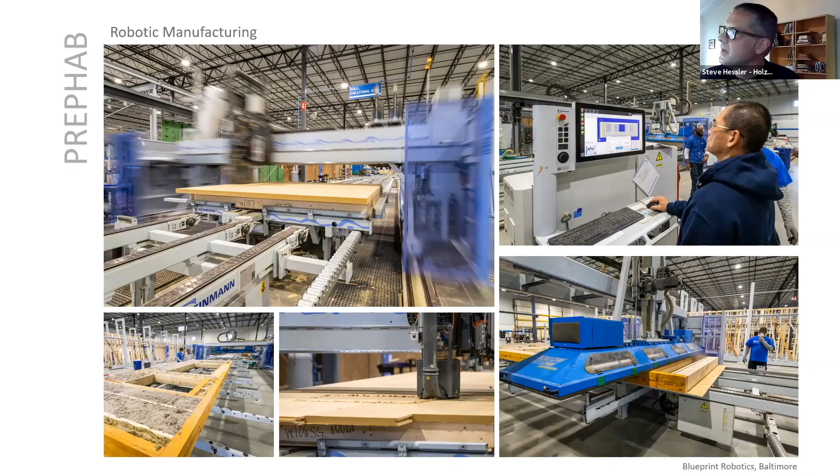Steve Hessler, glad to have you here, buddy. Thank you so much, thank you very much, I'm totally honored, and I really appreciate you guys reaching out. And yeah, so Holzraum System, I think a draw to what we've been kind of doing for the last few years, a lot of it initially came from some of the flashy, beautiful technology that came out of Blueprint Robotics when we sort of set up an arrangement with them.

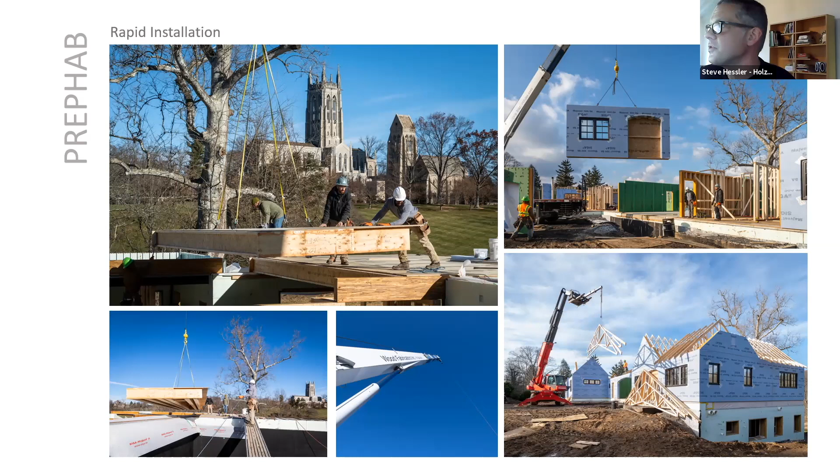They came in with an outrageous level of investment, and we got lucky. We found out about them when we were tired of doing multiple assemblies and site-built construction, and started to do some panelization. We came across them, and they'd been tremendous. We worked through and developed some initial assemblies with them, and they were our first fully fabricated manufacturer. People really came to know us through them, which was awesome. We've done some amazing projects with them and had great experiences, sometimes buildings with castles and amazing window packages, all passive house assemblies and projects.

So we've just been very fortunate. My partners, which I'll tell you about in a minute, and I have been blessed over the years to have projects with pretty decent budgets that helped us develop some things. But what we really wanted to talk to you about tonight wasn't the machines and the wonderful rapid installations, but all of the work that goes into any of these.

Whenever you see not just our projects, but any of these passive house panelization projects, you usually see panels flying quickly, blue skies. The only reason those projects make it to the screen is because they were successful in the field, because it's scary in the field and nobody's putting up pictures of the projects that didn't go so well. So we wanted to talk about all of the work that goes into a successful installation like that, fabrication and installation. It's just a ton of coordination and work.

Holzraum System is my two partners, brilliant partners. Ilka Cassidy is a German trained and born architect, and one of the best energy modelers in the Philadelphia area and probably beyond. I'm super lucky to work with her. Ilka and I met when I was running a design build department for Hugh Lofting Timber Frame, a good timber frame and high performance builder in Kennett Square.

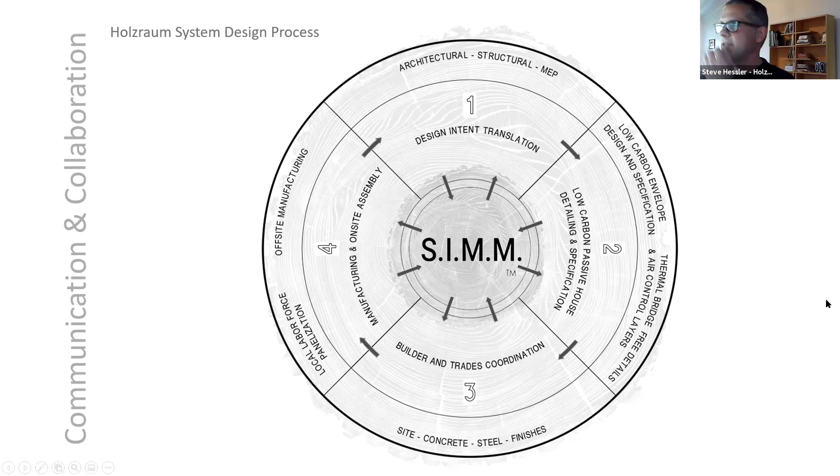So the next thing is, what is a SIMM versus a BIM model? Because a BIM model is also an amazing collaboration piece. We want you to know that the SIMM in no way replaces the BIM, but it sort of partners really well with what the BIM is missing.

So what the BIM delivers - this particular BIM representation is actually from Shannon from Sanderson Sustainable Design, and also Revision Architecture in Philadelphia, for one of our projects. This is a very high level, super detailed out BIM model, in our opinion. You can see literally every single brick in the brick ribbon around the windows, every single window is absolutely perfect.

The shop drawings, I know for a fact, came exactly from this model. Timber frames in place, vault ceiling design intent is in place. The design intent, for us to get an idea of what they want to build, is sick on a model like this. This is awesome.

And as awesome as it is, it doesn't have any framing in it. So I couldn't manufacture from this BIM model. I would need to, even just to do wall panels, do some level of interpretation - where in this wall is the air barrier plane, and what is the connection from the concrete to the wall? So there's a lot of fill-in that has to happen before.

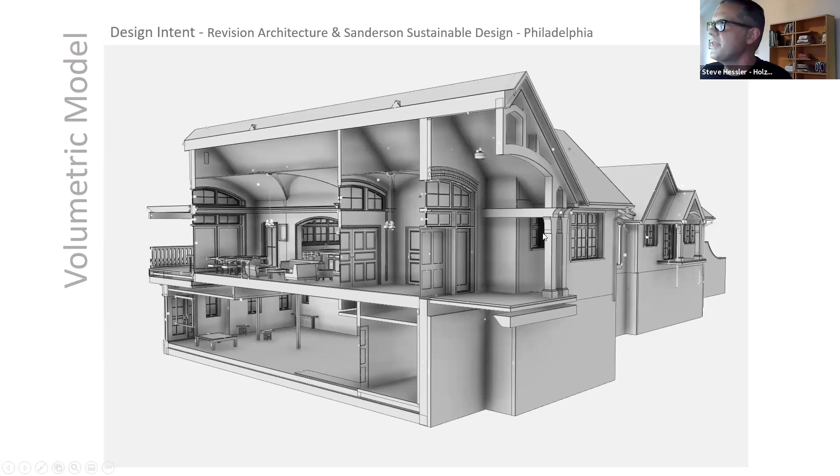So the BIM model is really a great coordination piece at a high level, and it's beautiful at delivering design intent in a format we all know, like plans, specifications, and schedules of windows. A SIMM model doesn't do that well, so we don't want to do that.

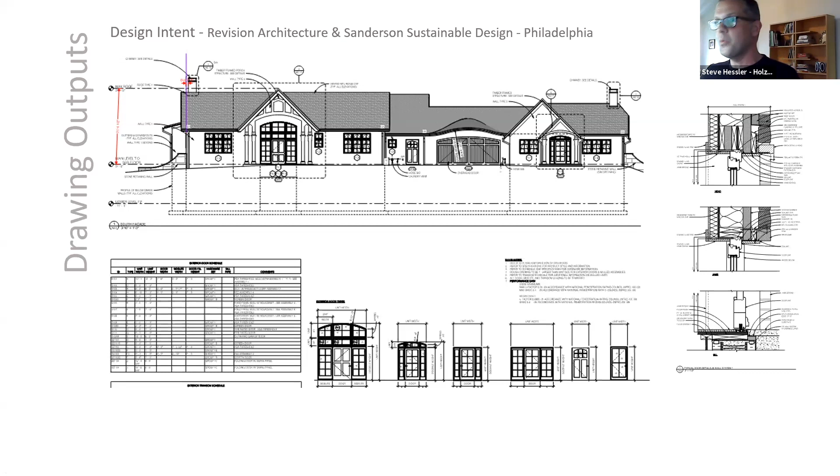But what we do is take their design intent and create actual manufacturable parts. This whole thing evolved with Ilka and I when we did our first two projects with Blueprint Robotics, and we learned quickly that they were only going to model what they were going to make, which is important.

When you manufacture walls, floors, and roof panels, you need a parts-based model. A BIM model isn't that, although it can be a very good one if somebody gives you the MEP as parts-based, which is awesome. A BIM model with plumbing and HVAC is brilliant because it's sort of a production fidelity parts model. So what you need to manufacture walls and passive house assemblies is a production fidelity parts-based model.

That's what we do. We go back to that circle, get all the design intent, and build out every stick, sheet, sometimes fasteners, concrete, insulation under slab, insulation at walls, insulation in the cavity, insulation on the exterior, sheathing for floor and deck. In this case, actual roof trusses that came and were delivered.

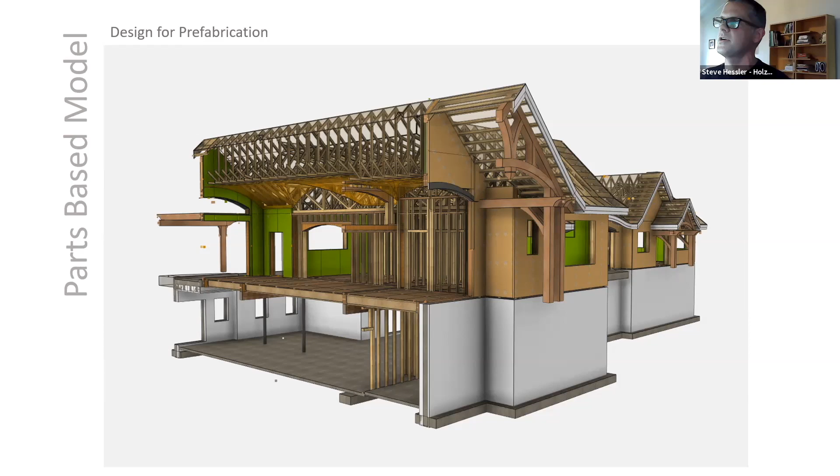Usually when we have roof trusses, we go back and forth with the truss manufacturer so we have actual geometry and know everything will line up. So you need that model to manufacture, but the real reason is you need these basic outputs.

You need panel drawings, you need people to know what's coming, and you need coordination down here in the lower right. This is where we started to coordinate with that groin vault system that was prefabricated.

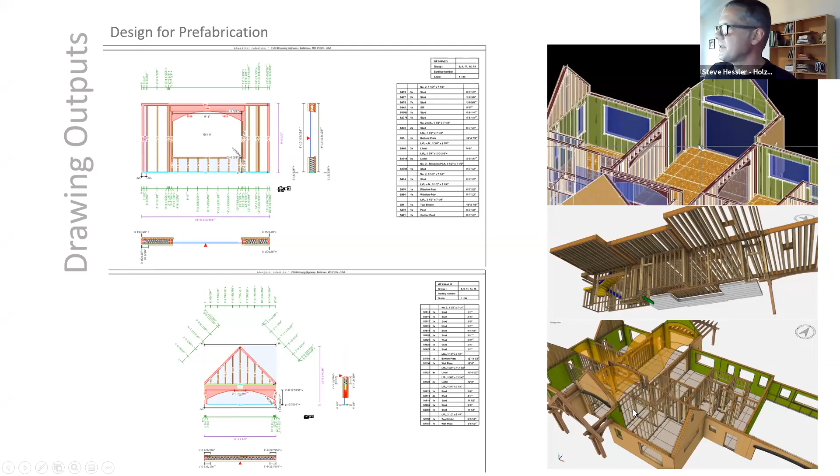You also need installation drawings. You need to know where your floor panels are going, where your wall panels are going, and what to expect in corners and all these details.

So what we figured out is that as soon as you need that very high fidelity, dense parts-based model for the things being fabricated, we saw great opportunities for more than just that. That's why we took what was a production model required for fabrication and turned it into something with greater value as a holistic project coordination model, which is the SIMM model.

I'm going to try to be quick here, but I'll tell you about the opportunities we're working on right now, and then maybe a couple we're thinking about for the future.

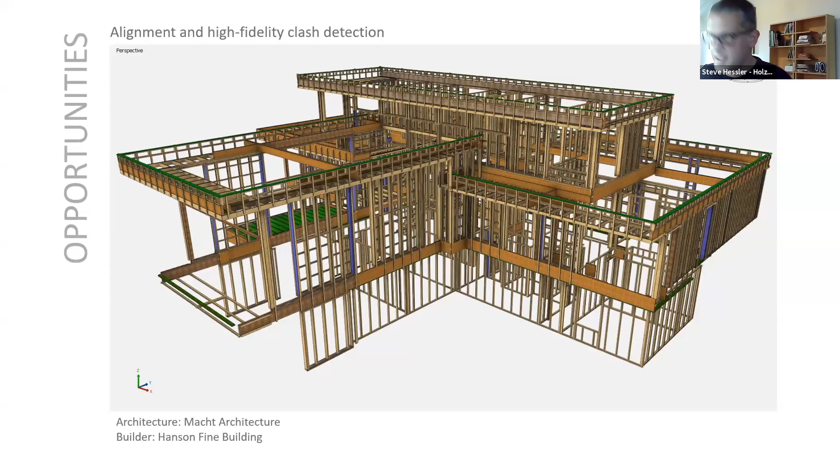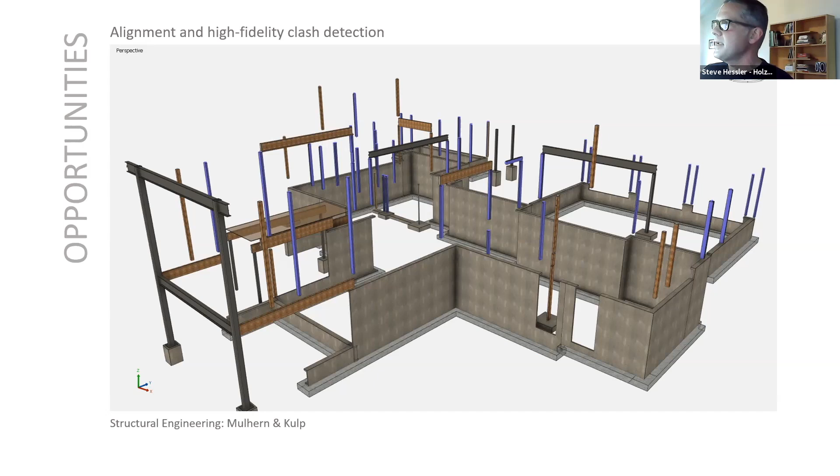The first opportunity is clearly a very high fidelity alignment and clash detection between all the different components, like structural steel, concrete, and MEP. We bring in or create MEP content accurate to the plan, and work with the structural engineer to find exactly where the point loads and structural steel components are. In this case, we'll have an armatherm detail underneath point loads on concrete to avoid thermal bridging. So we're putting all these parts together, but we can also peel them apart very quickly.

I'll show you when we have the model open how a parts-based model like this one has so much data attached to it that it actually becomes a great way to navigate a model much quicker than a BIM model. These are the floor trusses and roof trusses.

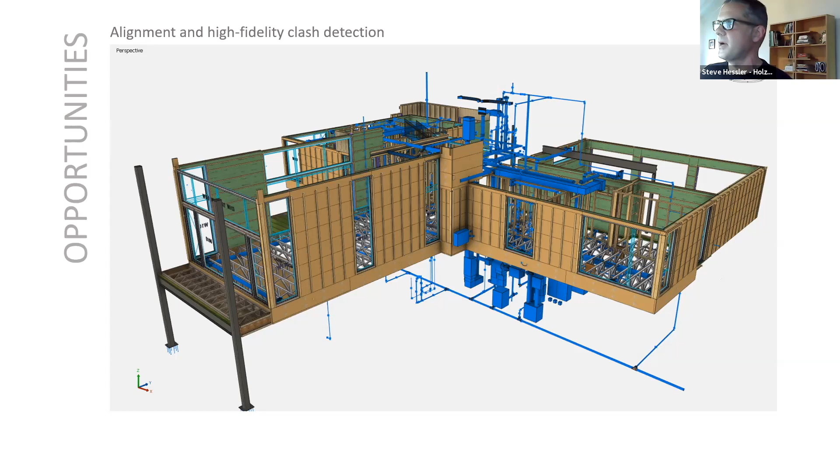We model them first as just very basic, to say based on all this design intent, we believe this layout should look like this. If you bless it structurally, then please tell us and send back your geometry. So we like to bring in content - we don't need to create it all ourselves.

We love to create content, but we also love to work with your content. So we bring in content when there is another fabricator involved.

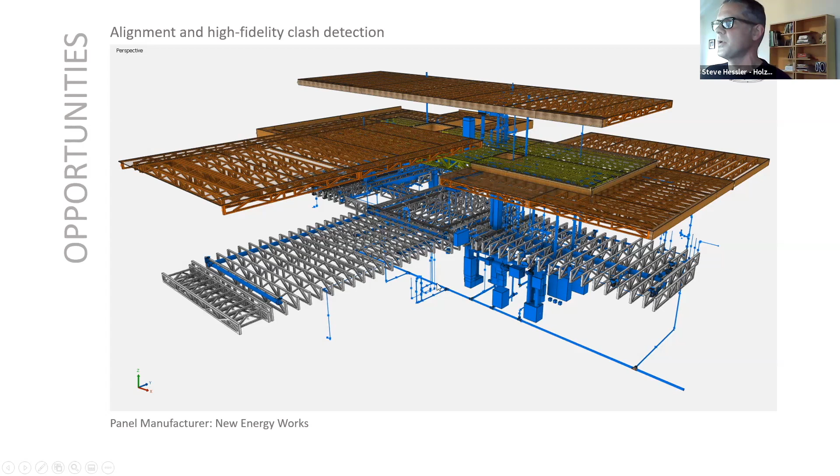And I think that's another big missing piece of a lot of fabrication coordination. It's awesome to have the MEP in there, and make sure everyone is clear and we all agree on vertical and horizontal alignment and duct clearances. In this case, they accommodated duct work for all the trusses, really where we want it. Then we end up with a full build that has all the skins, and we panelize it. I'll show you that a little more.

The next opportunity is risk mitigation and the information log. The value, I think, for any offsite fabrication from any passive house panel company is it starts with risk, and it ends with risk. It's all risk to me.

When we were doing all this by hand, all the passive house builds, well any builds, but especially with passive house, there's a lot of risk going on because you're trying new assemblies. You're pretty good on your building science and thermal bridging, and you're relying on a lot of great people, but you really don't see everything. You just see it in 2D sections. So with a model, you can really get your hands around everything.

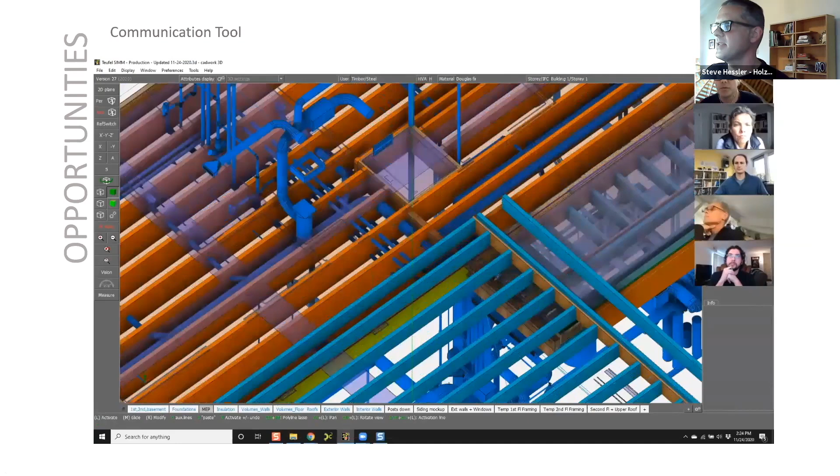So what we do is, as we build this model out, it becomes this kind of communication tool, and it becomes like the conversation piece in our weekly or biweekly meetings. We can just take this thing and focus in, in that design log I showed you.

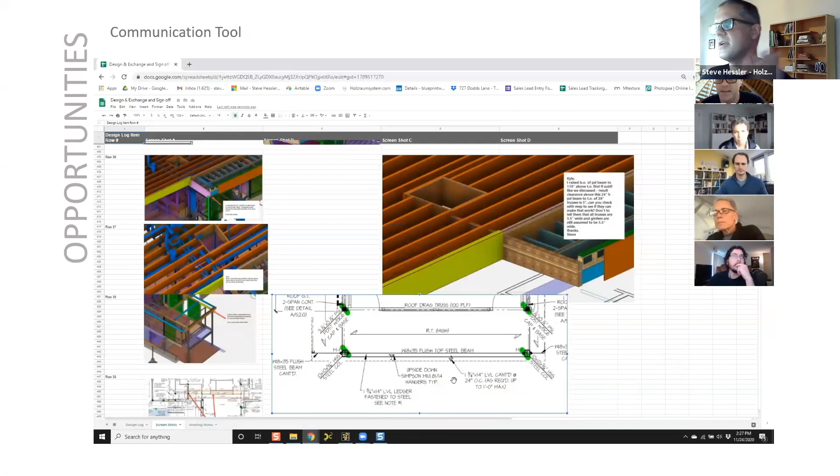As we're modeling, we're basically cataloging where we see conflicts and questions and things that need to be resolved. So we grab screenshots from the model, we throw them in the design log, we call it a row item. Then when we're in the meetings, we can very efficiently, in a very direct line, go through the design log and pull up these parts and have the team talk about them.

In this case, it's me and Ilka and the two architects and the structural engineer. We also then end up having charrettes with the MEP engineer. It's really fun because you're still doing a Zoom meeting, but you have this 3D model.

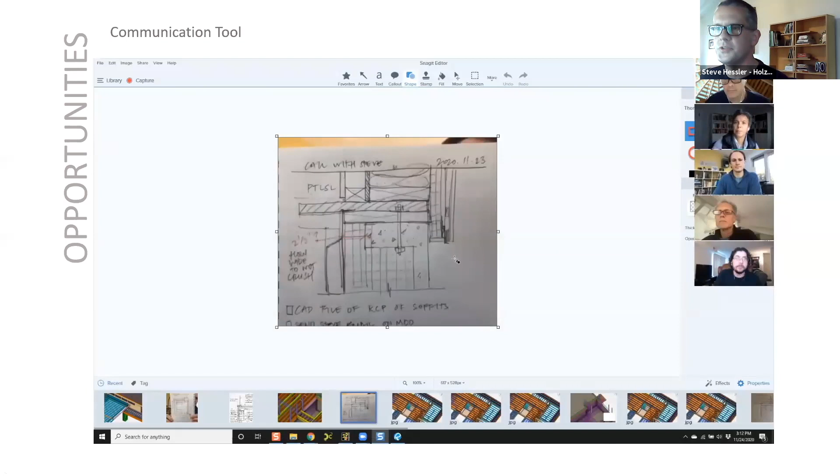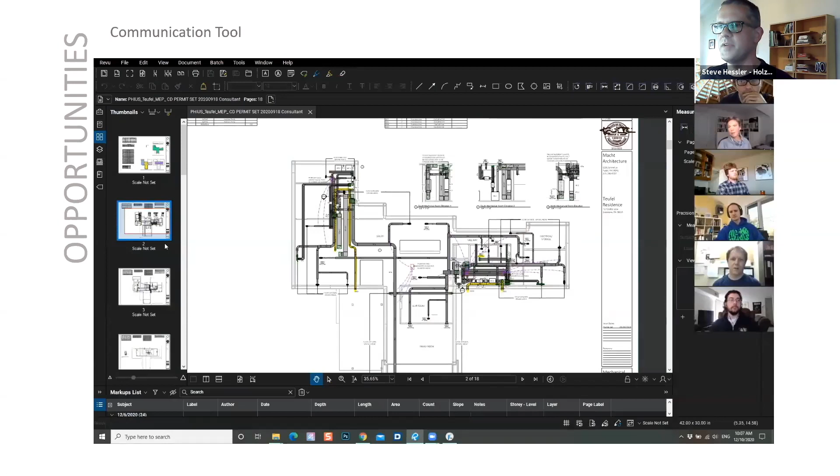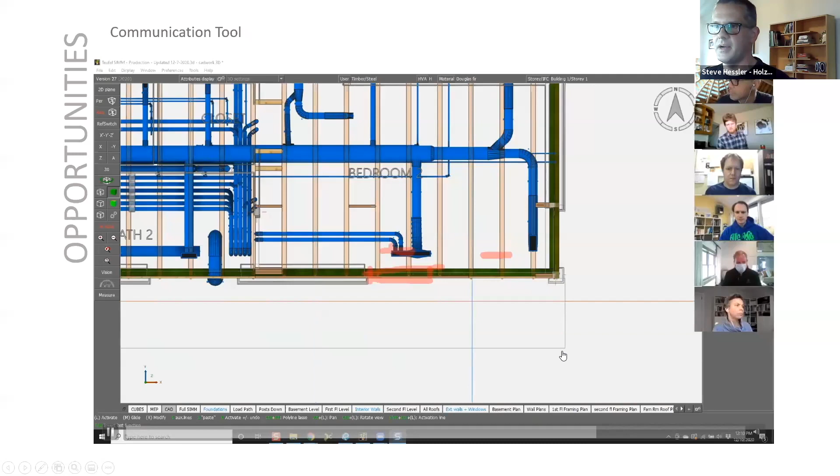Sometimes it's better to do a hand sketch. Sometimes Kyle in particular loves to draw all over our 3D model, and he's always like, stop moving, I'm trying to draw on top of your model. But what's totally awesome is that in the Zoom meeting, which is based on the design log that we came up with as we were modeling, we're doing screen captures from the Zoom meeting and it goes right into the design log. So the design log is always on when we're modeling. I think that's just another cool thing.

This is the 3D viewer. All of our clients have a version of the 3D viewer, and they also get a non-editable cadwork license. If it's a good project and they're going to work with us, we get them a cadwork license. They can't draw, but they can really get into the actual SIMM model, and we hand the SIMM model off afterwards. Yeah, this is Kyle drawing on top of my stuff.

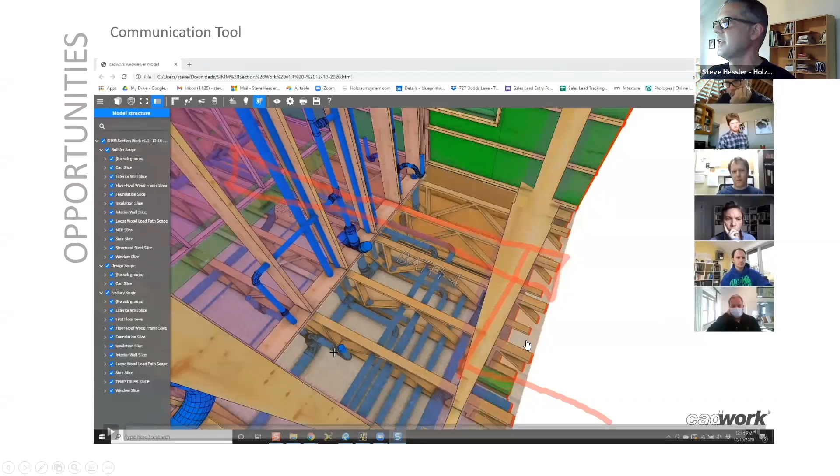Yeah, risk mitigation and information log. It's just endless different things that we find and have questions about and need to work through. This is another opportunity that we really like about - it's not just our stuff, but generally passive house off-site manufacturing.

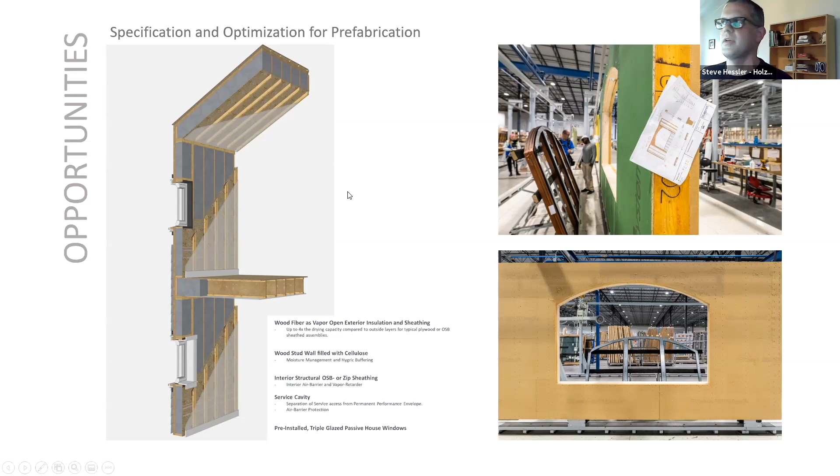We get to eliminate the desire by somebody on a project team to value engineer out low embodied carbon. We get to just say sorry, and we do it all the time, and it feels so good. We say, you know what, the factory doesn't do anything but wood fiber insulation on the exterior and hemp or cellulose in the wall cavity. And these are the reasons why, and we love to show them how badass this vapor profile is. Then we say that's the only way the factory will do it - we actually lie and tell them the factory just won't do it another way. But that's because that's what you can do when you have a panel company that's sticking by their guns and saying, this is what I'll do. It doesn't mean they might not tweak those assemblies, but they're only going to make it the right way.

I have to go back. Another opportunity is the passive house detailing.

So Ilka can take the model and she can slice and dice that thing and discover every problem that would have been in the sequencing. We typically do a membrane strategy, so there's a lot of leaders, and it's all about the sequencing of the construction. If you don't have the leaders in the right place when you go to throw a floor panel on top of a wall, or a roof panel on a wall, or you have a steel beam that somehow penetrates through the air barrier, she figures all that stuff forensically.

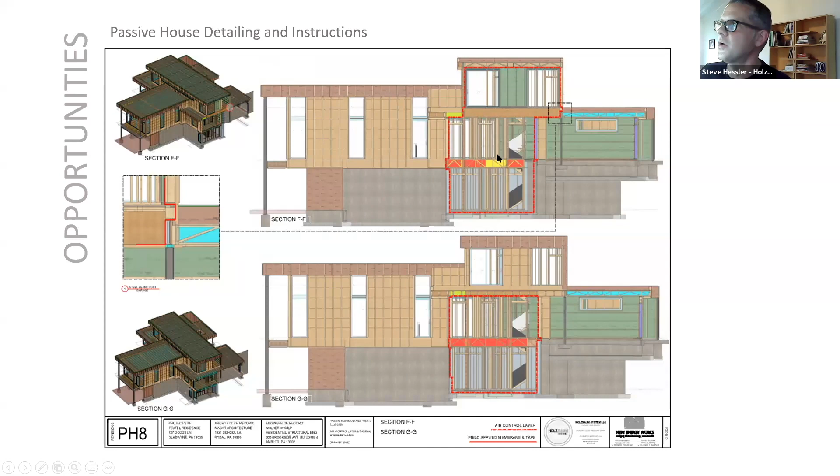She goes through and creates a red line drawing, but then way more. She's really closing in on the details that become instructions for the builder or the installer.

The next opportunity is trade and field coordination, which can happen in a lot of different ways, but two of the big ways are through concrete and also the structural steel. So we don't do the steel shop drawings, but we either create the content that we have interpreted and then check it against their steel, or they give us an IFC file.

And on this project, it was great. We got an IFC file, we checked it against our design intent. And then these are just some little pieces. We did a 3 or 4 page kind of 'these are some holes you guys didn't know about' document. And I'll show you an example in a few slides on how that works.

But on the concrete, it's really, really nice because I don't know if everyone has had the same experience that we had for like 20 years, but a lot of times it's a little confusing when you're looking at laying out your foundation between what the structural says and the architectural says. And sometimes you're almost using both and you're making a lot of judgment calls as the builder, and it just sucks.

So what we like is that because this is a fabrication model, this big house is a 7,500 square foot house of wall, floor, roof panels, and other loose parts are coming. And if they come, this foundation better be within a 1/4 inch. What's great is because of that, this coordination model is just what it's going to be. It's not like there's a dispute. It is what it is. As long as everybody reviews it and approves it, then that's what's going to be.

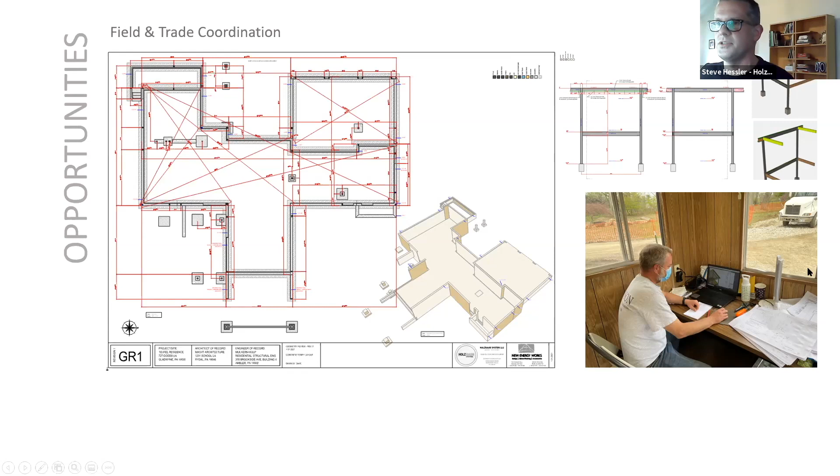And then this is cool. This is our builder on this project from Hanson Fine Building, Chris Hurl. We were on site, actually verifying the ideal precast walls. And I said, yeah, I got your email about that structural steel question you had. Do you have the laptop? Can we go look? So I go into the trailer, and he already pulled up our SIMM model, and he navigated right down to the pieces that he wanted to talk about. And I was like, dude, you're totally gonna make me cry, because I just love that you can use this model. When we're gone, you can use this model.

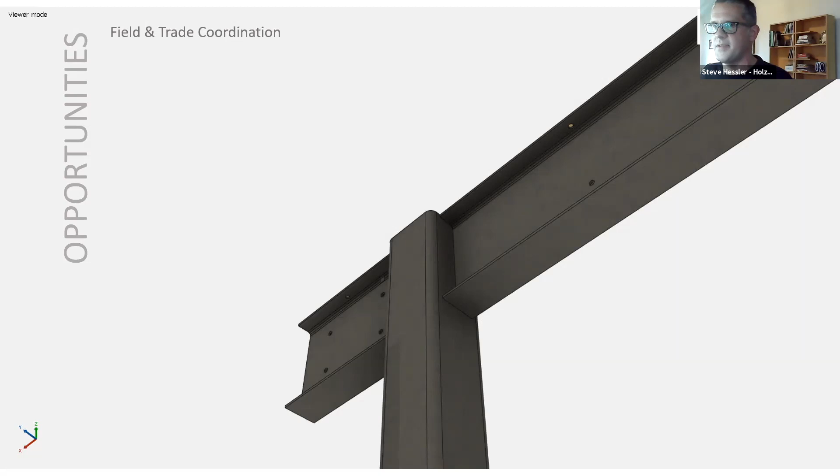So this sort of magnifies the level of coordination that a project like this, and even a much smaller project, could need, right? So this is a piece of steel, and this piece of steel has some holes in it. It has holes in the top flange that are pretty basic - they need to receive a wood plate, but there's some blocking that's going to happen. And that blocking needs to be here because it's going to hold up those trusses that were from another fabricator.

So the steel's from one fabricator, the LVL is from the builder, the trusses are from the truss fabricator, but they're coming to the panel company who panelized it from our drawings. And so when that whole thing comes, it's like 3 parts that all need to come together, but they're coming from like 4 different people.

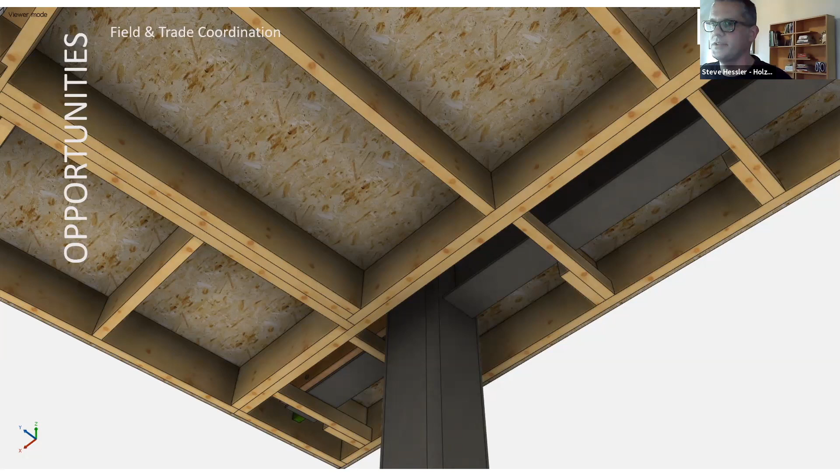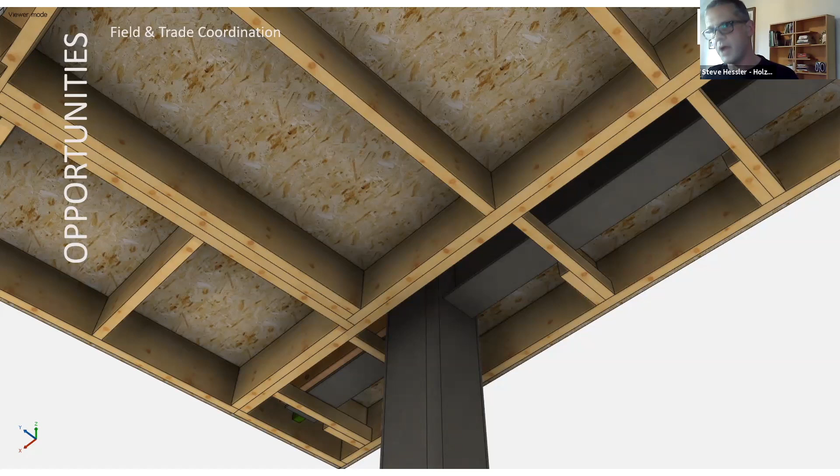And then underneath that, there's going to be panels for the exterior soffit panels that need to fit and need to have some way to work around each other. And when it's all done, that's one corner of a 7,500 square foot building that has corners like that all over the place. So there's just a need for coordination, and we're just giving you one way we do it, but all around the board, we need to figure out ways to get design intent married to parts. That's kind of our thing.

Here's the opportunity that is the most fun for my brother, and I think also for Ilka and I, and that's the data attachment. The thing that's cool about this is we use cadwork to create this model. And what's cool about cadwork, I know you can attach data to BIM models, but when you have thousands of parts in a model, that sounds like a lot of work, but a lot of them you can populate pretty streamlined. Every single part, you can assign unlimited amounts of different data attributes.

And then every one of those data attributes becomes a search. It's almost like a thread, right? So you can now say, okay, I'd like to activate all the parts that are spruce pine fir, they have a red dot, and they are 6 foot 2 1/4 inches long. Boom, two clicks, and I have all those parts. If I wanted to say I'd like to see all the concrete, all the PSLs, and all the Armatherm, boom.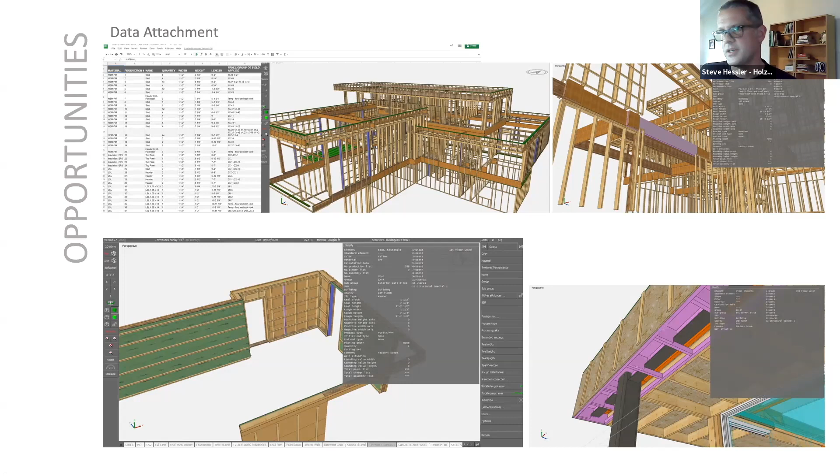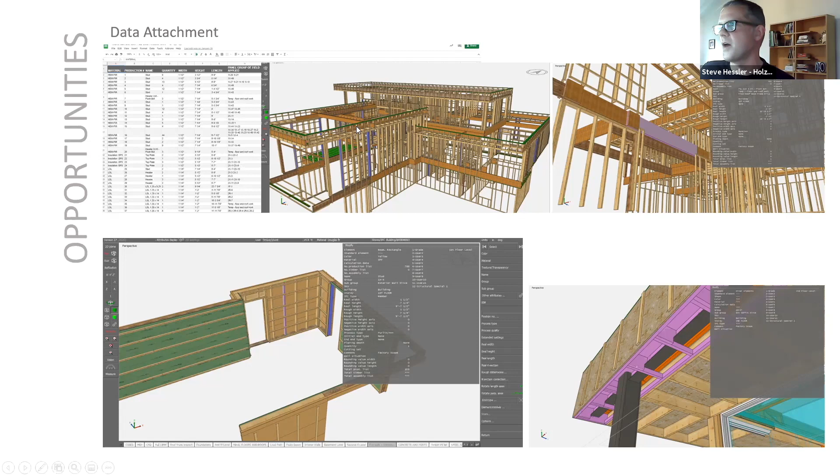So that's what I was trying to say about the data attachment being awesome for outputs, for takeoffs, orders, pricing in the field, and also especially in the factory. The factory needs parts lists and everything. But what's awesome is that when you put the data on there, you don't want to put data that's not necessary, but if the data can deliver value and you put the data as this thread to basically navigate your model, the more data, actually, the easier to navigate the model.

So we've been talking about factories, but what's really cool that we also realized is this other opportunity: the shop drawings and panel drawings we create from this content would also be really good for anybody that has a warehouse and a nail gun, or somebody that thinks next year they're going to have a good year and might want to buy like a Hundegger, or anywhere in the middle. Between Blueprint Robotics at this insane investment level and the guy with 5,000 square feet and a nail gun, there's about 150,000 different types of investment and risk and excitement out there for the grabbing. And what's awesome about a parts-based model is it can serve every single one, because it has the thing you're going to build, and it can deliver shop drawings, machine files, or 3D files.

So this is a project in Baltimore we're very excited about. It's the Baltimore Community Land Trust, and it's affordable housing. I don't think they're calling it technically affordable, but it is for an underserved community, and I know their budget targets are very affordable. The idea is that in this region, the people who build and also own are going to keep all the equity in the community, in the neighborhood.

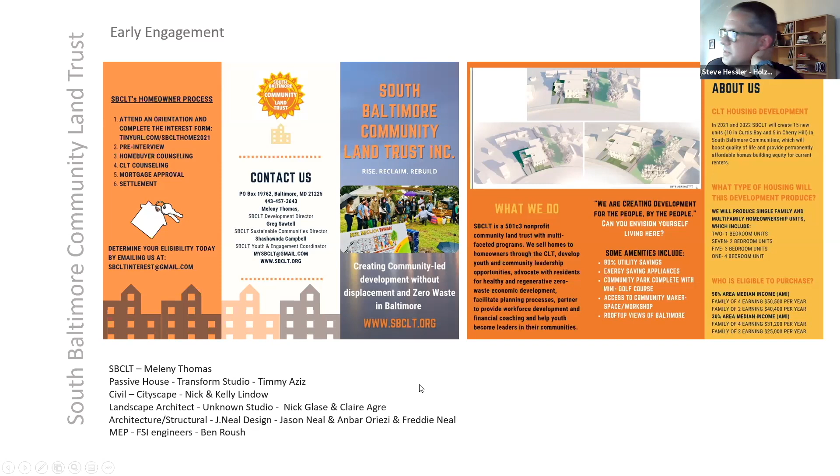Actually, I wanted to say the architect that brought us this is Jason Neal and Meleny, the one who runs the whole program. Anyway, awesome program, you guys should definitely check this out. There's some stuff online about it. We're happy to send you some information, but we're very excited about it.

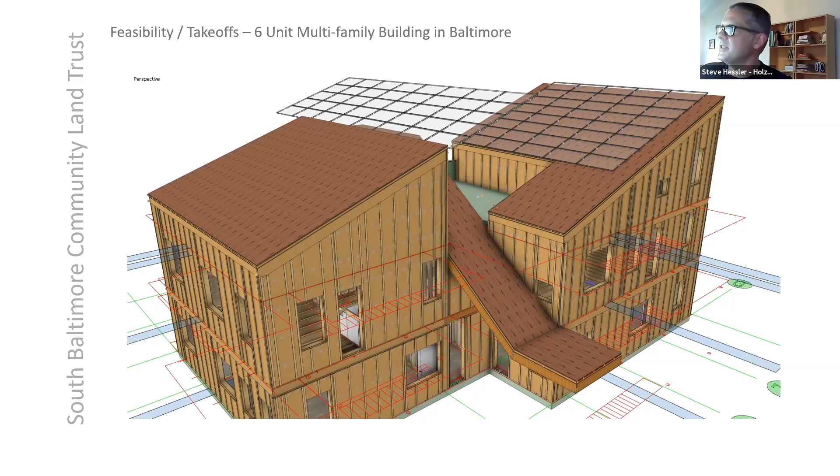This is getting in early on the project. These are a couple of the 2-plex and then the 6-plex. We're just starting out, doing some really basic rough modeling. Now we're to a point - I'm actually a day or two late, that was one of the deadlines I was working on - but we're going to feed them takeoff information that's not ready to build, but is pretty damn accurate for all framing, all TJIs, all LVLs, glulam beams, plywood.

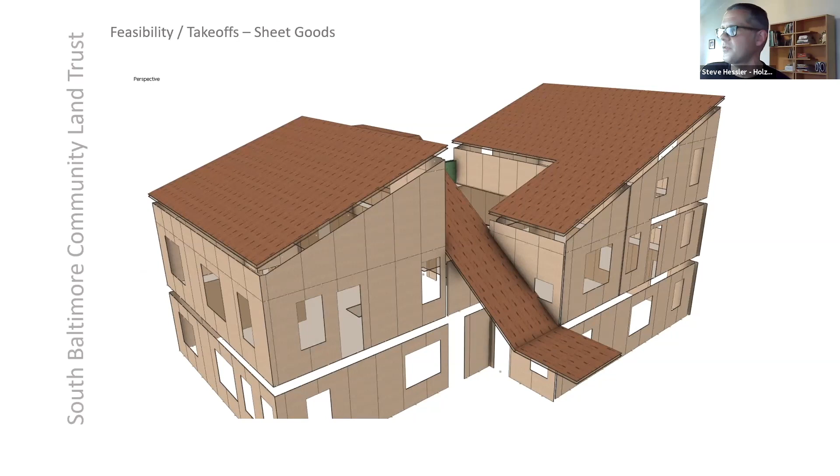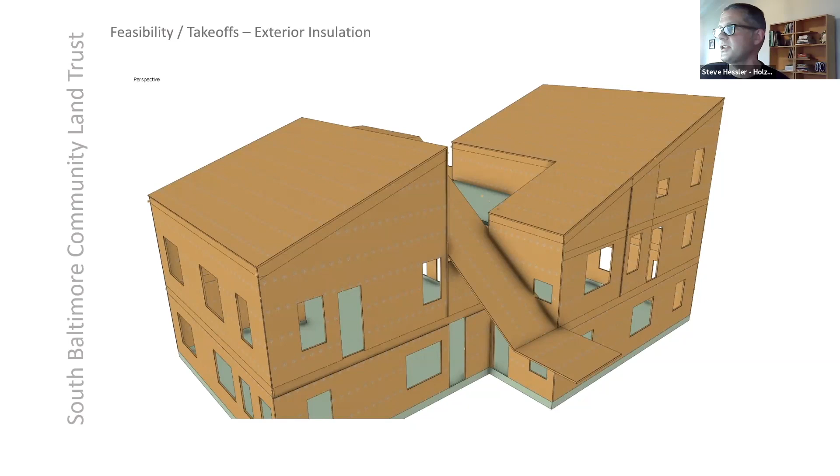They're hopefully going to do our XP10 open wall assembly, so there would be either a CDX with a membrane or possibly an AC plywood taped, cold roof on top. So they're going to have takeoff for all the sheet goods, takeoff for all the hemp bats, dead accurate takeoffs, which is really nice. Takeoffs for the Steico exterior insulation and foam insulation where required, and then TJIs, and then they're actually going to get takeoffs for the drywall.

What we're doing is working on the rough openings that help us create framing. We're attaching data to the rough openings so we can also give information on tapes, membranes, and sealants related to window and exterior door installations.

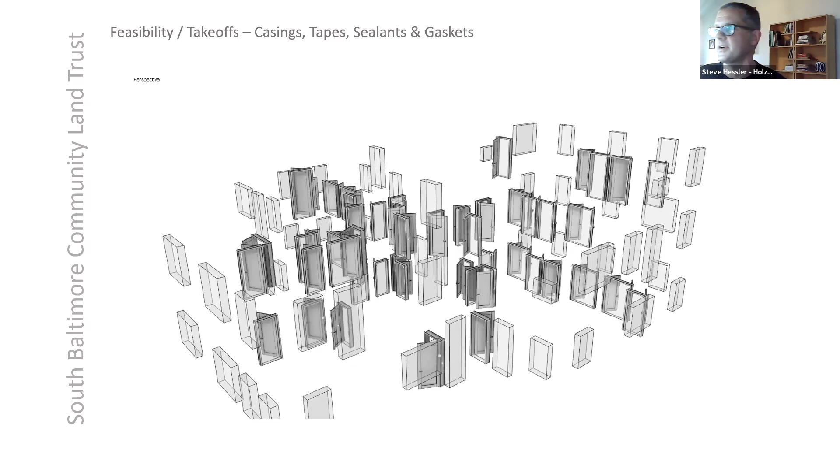So that was a lot of stuff. Now I'm going to show you something completely different, and I'm almost done, I think.

So now I told you that we have these cool partners in Stoltze. When we connect to cool partners, it makes us look cool. That's why we're always looking for cool partners. And these guys are pretty freaking cool.

They've been importing, and their plan is, they're in development right now, and I'm hoping that next year they're going to be manufacturing from small diameter timber, glulam and CLT components in Montana, which is cool. We work with them on their projects out West, and we also can work with their stuff if it imports into places like Baltimore or Philly.

So what we started really getting into is not just the CLT and some of the different torsion box and engineered CLT type products, but we started getting really excited about the hybrid, because we've got a lot of experience now with light framing, and we can kind of deliver a light frame design-to-factory kind of offering.

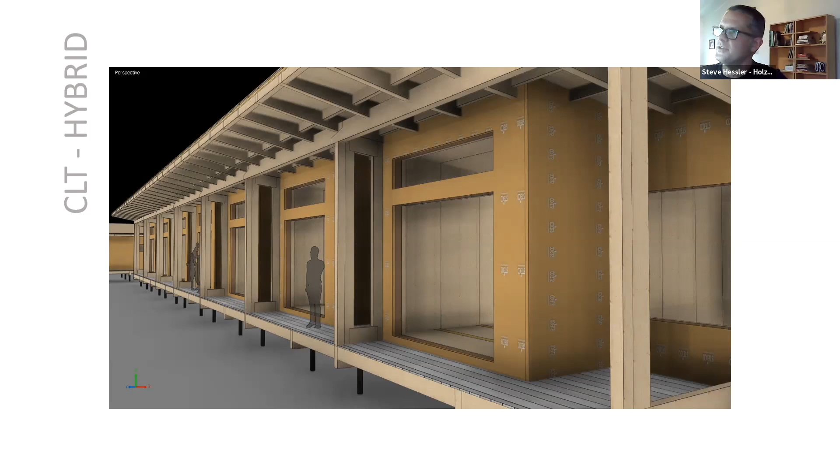If I just take it apart, I take the Steico, the exterior layer off, I go to Steico Therm, and then I go to the CLT walls, and now I'm taking off the 3-ply material. It's like a thin CLT, a really cool, huge, long format plywood, kind of European plywood that you can throw down. You can get it like 15, 16 feet long.

It's ridiculous. What you're looking at there would be all pre-cut, dovetail housed, very few fasteners. It's decoupled, thermally decoupled, so you can see there's insulation underneath. The whole cantilever is decoupled and has a very small thermal bridge profile.

Take off those, we've got post and beam. All of this comes from one manufacturer. Then we've got these portal frames that we were able to do in the CLT. Then we've got boxes, walls, and take the deck off. We've got either conventional or a pre-cut deck.

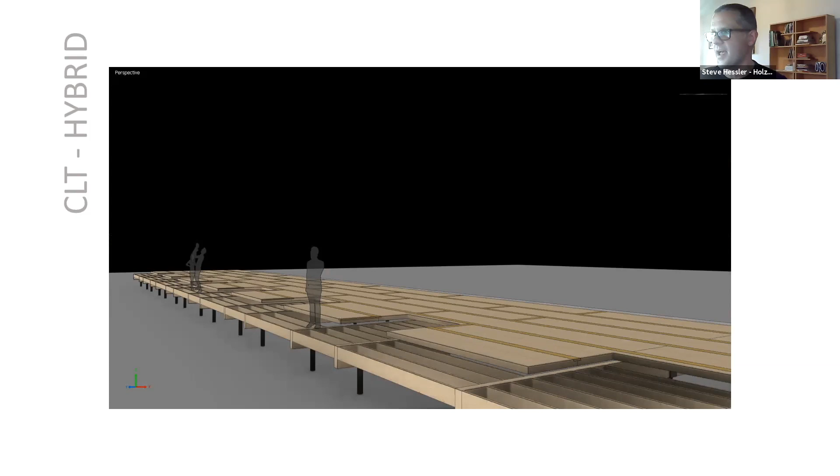And now we have this deck, and Ilk and I were like, well, what about if we just put one of our wall panels on it? So we just took the deck and then we put some of our wall panels back in. This is the framing for our closed wall.

Inside, we have the sheeting on the inside on that wall. Insulated, there would be cavity insulation and the therm and the Steico. Then we just basically put the exact same CLT components back. So the only thing really in the building that's changed is the walls. And then we throw the post and beam back on.

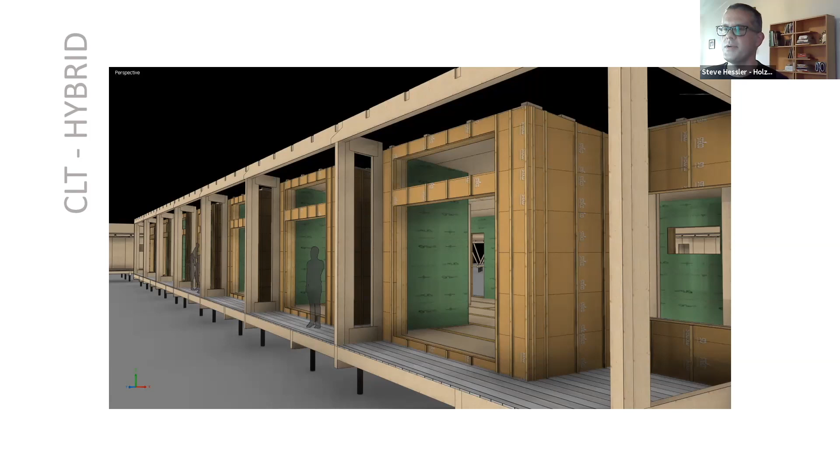This all came in. So really now we have two vendors that have delivered the whole building instead of one. The sequencing is really pretty sweet, especially on a one-story, but even on a two-story, not really bad. This kind of thing could be very easy for any builder to put up. We kind of map it out: bring back in the thermally decoupled roof, throw on the 3-ply, and get your beer.

So that's the presentation. And then did you want to wait until I show you the model, or what do you want to do?

I think I want to clap. Yeah, I want to clap. I want you to take a bow. Wow, Steve, even better than last night. Yeah, that was terrific, Steve. Thank you so much. What an... Steve, Steve, your audio was off.

Can you start again from the top? I think my wife wishes my audio was off a lot more often. Love it, love it. Just like your renderings, it's TMI, brother.

I think we could go to the modeling, right? I think we could jump right in if you want to have a swig of beer and let everyone stretch their limbs, and go for it.

Steve, I've got to say, while you're doing that, I always thought takeoffs and coordination down to the stud was fun, but takeoffs down to drywall and tape? Seriously, what is next? The number of nails? Lunch orders for the crew?

Does it make breakfast? Well, for CLT, we will definitely be modeling fasteners. You have to sort of play with the memory, the size of the file. In timber framing, a lot of times you're modeling fasteners because you kind of have to, but it can get a little weighty on the model. The thing about it is they're costly, these fasteners, and so if the model can deal with it, it's a very good idea, because then you just have a much more accurate takeoff. When you have it in there, you can run a list on it.

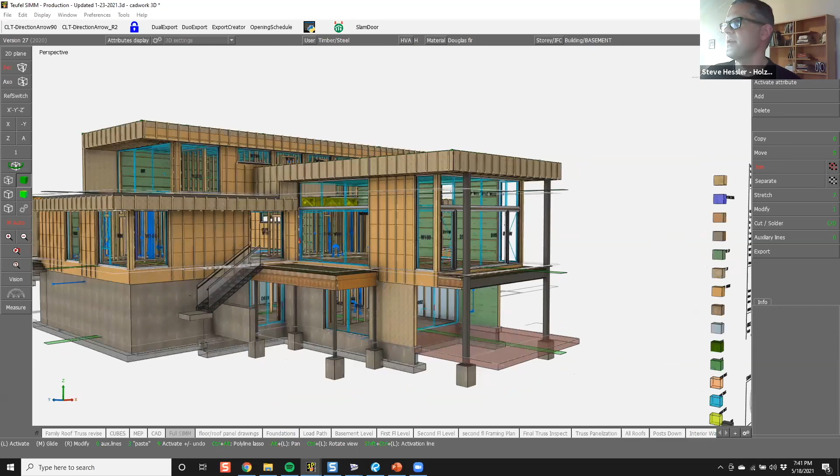Okay, so the outputs - this is the model you were looking at for some of that stuff. This is the 7,500 square foot certified passive house in Gladwyne, an affluent neighborhood outside of Philadelphia. It's actually in production at New Energy Works, and they're going to start installing floor panels next week, which is crazy. I'm going to come back to the model, but I wanted to show you the outputs really quickly.

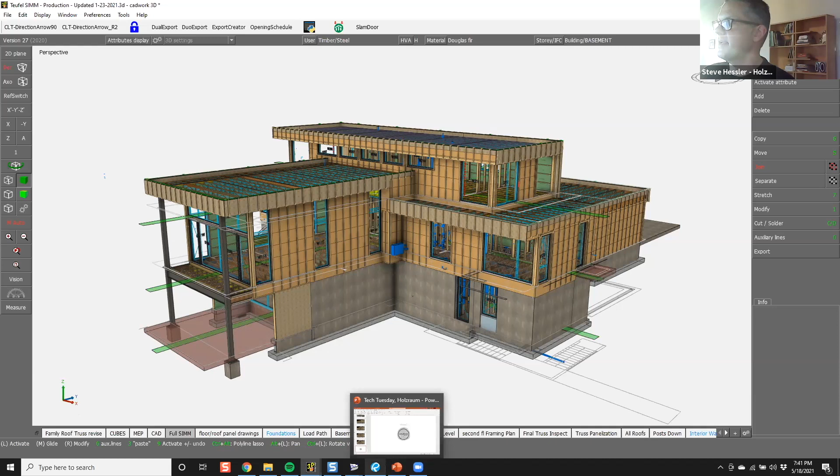So there's sort of two drawing outputs. One is a geometry review set - it's like a shop drawing, but it's that risk bucket thing. This is a really huge piece of the risk bucket. If this thing doesn't really tell you a lot, then there's not a lot of value in it, because when you have a building with this many parts, if you don't get to see those - if you only get 3 or 4 building sections - then everybody just has a lot of risk going on.

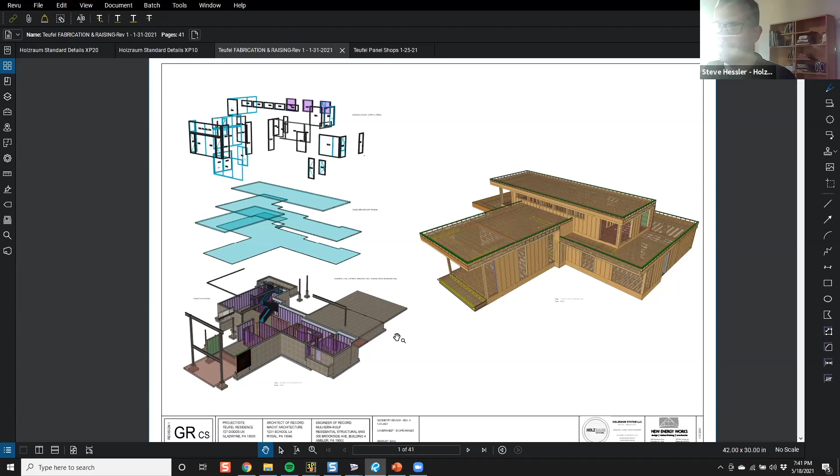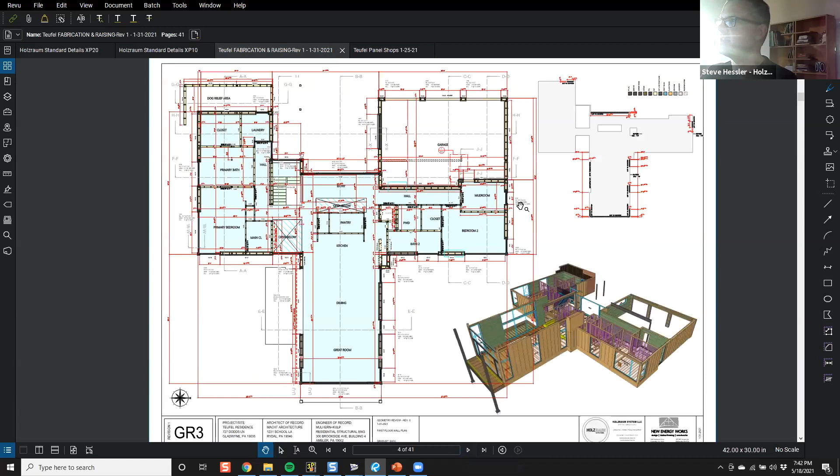So I'm going to blast through this, sorry if you get a little dizzy. Basically factory scope on the right, builder scope on the left, coordination drawing - you saw that for the foundation. This is builder scope because they did the walls inside, so they didn't need this, but they could get panel drawings from us if they wanted - they're going to site build. So this is the first floor, the first wall plan drawing. Because you've modeled precisely every stud and every piece of insulation, and this is the service cavity on the inside with the zip and everything, you're able to extract dead accurate sections, cuts, and everything. So the wall panels are in there.

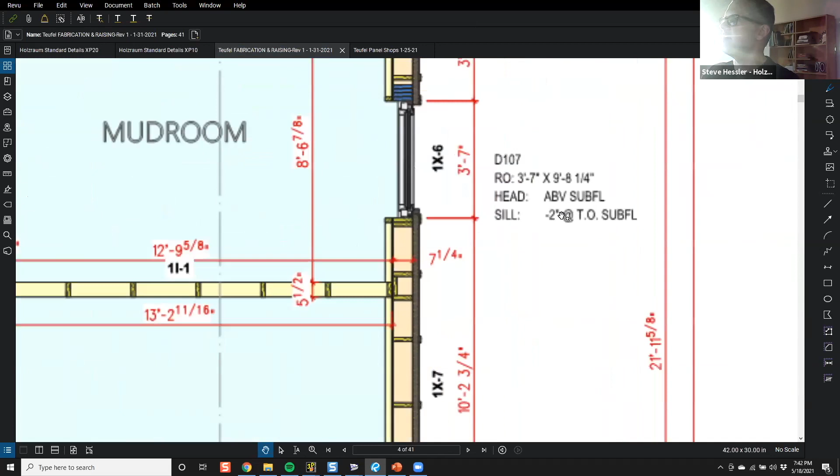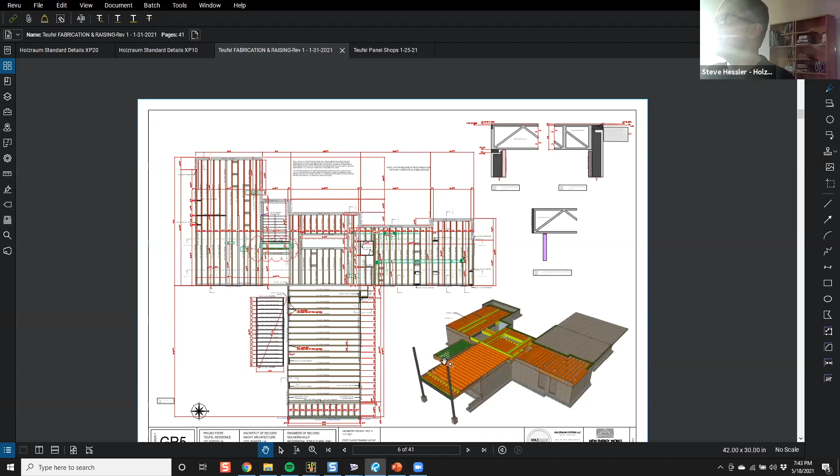We still have all the door information, the door tag information, so it's a pretty easy set. Every page in here is color coded, hatch color coded, with the idea that we're trying to limit the annotation burden, not only for us but also for the interpreter. That seems to be working really well in the factory, and also for the reviewers, like the architect and builder. So I'm just going through - this is the next floor. Now we're getting into the structural floor plans for trusses. We had that MEP model, and this content we were actually able to generate from the MEP just being in the model.

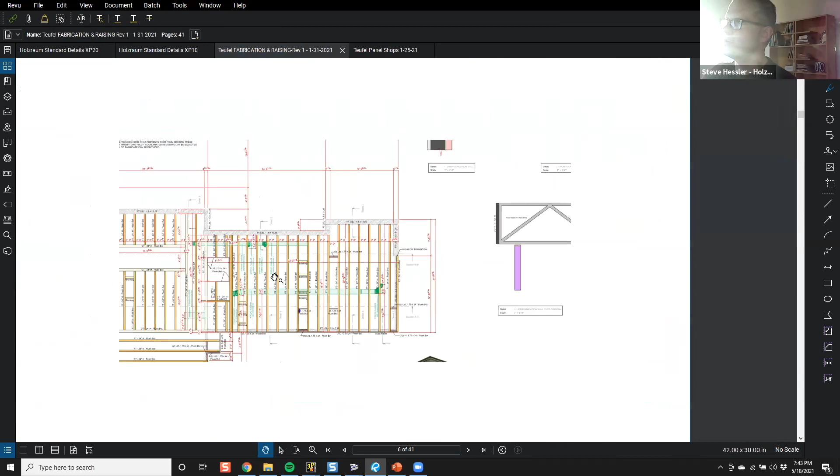Now we've basically told the truss fabricator we need a 20 inch by 14 inch clearance, centered vertically or aligned top and bottom. So we're just making sure everybody is cool on trusses. And then we're going to do that with the next level, and then we're going to do the roof.

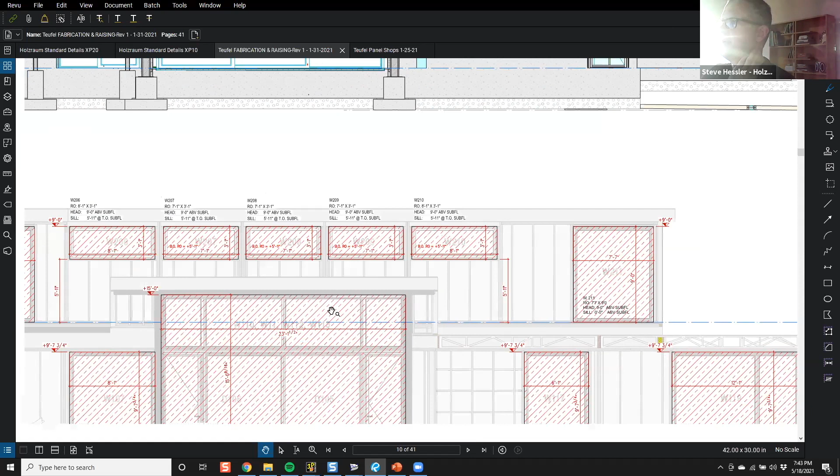And now we get into elevations. This is the same elevation, showing the skin, exterior skin, and then showing the framing and absolutely everything about that rough opening, including floor-to-ceiling doors that some of them were set low. So this door is set a half inch low, cut into the subfloor. This one's not. Everything has to be perfect. There was a very expensive window and door installation, and Holzraum System doesn't carry that level of insurance that we want to buy $200,000 worth of windows and doors. So we just need to make sure we tell everybody this is what you're getting, so look at it and make sure it's good.

But we like it because it seems pretty easy to see the things that are critical. Your eyes are always drawn to critical plate heights and ROs.

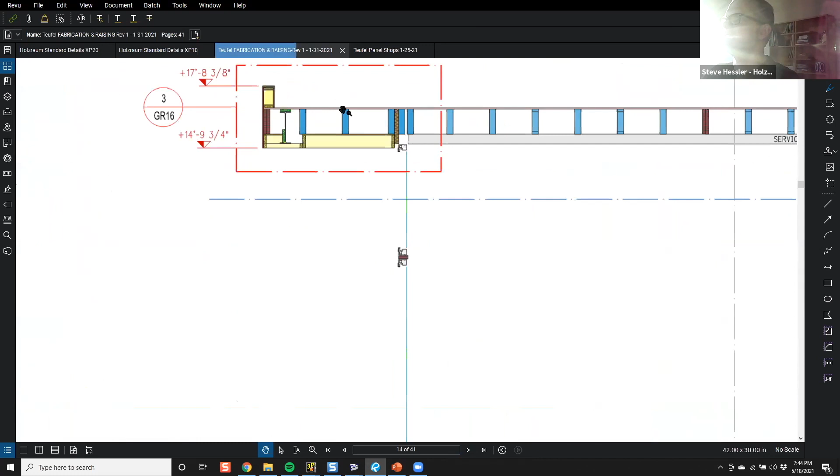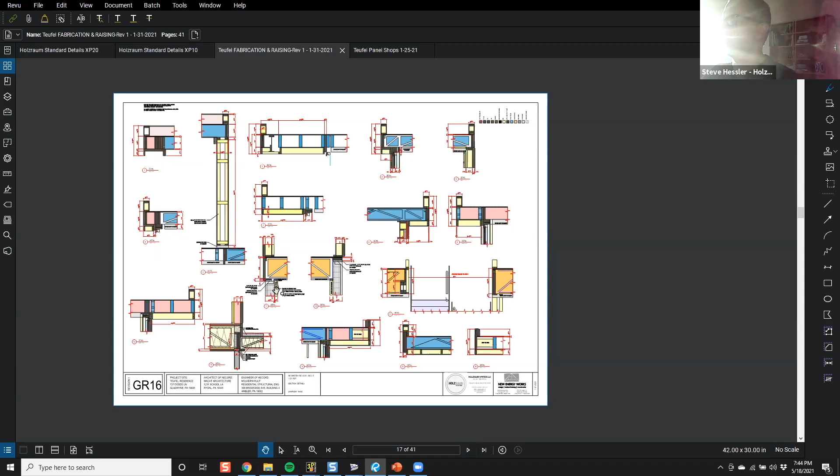Now we're getting into building sections, and these are exactly what these assemblies are going to look like. There's not just a 2D detail that happens at one spot, this is what's happening, and these are dead heights that we're going to hit. Then we can use those details and blow them up a little bit, get into more sections, threshold conditions and window conditions. We can now really get into exactly what's happening at the foundation.

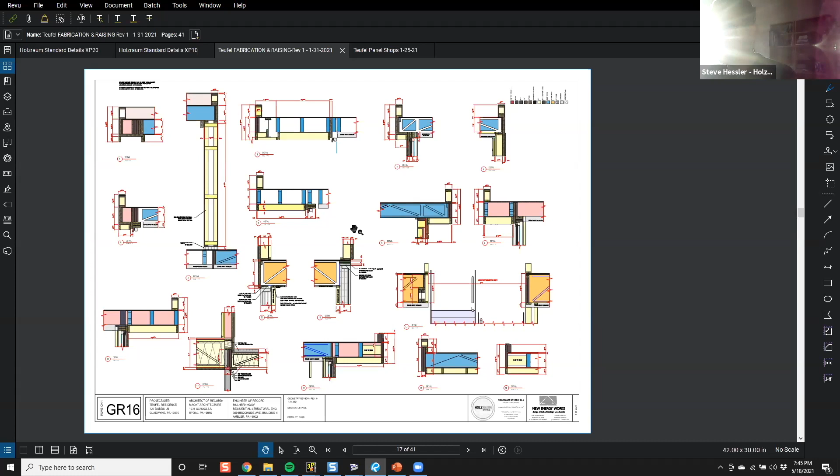It looks like a lot of work, and it is a lot of work, but a lot of it comes because we put the model in. If you build the parts, you can extract these kinds of outputs really quickly. When I worked in Vectorworks, I'd have a model that was pretty coarse, and I'd get these great sections, but I'd have to draw all the CAD on top of the building sections. I know that happens in Revit too, you're basically drawing in 2D on top of your 3D section. The only thing drawn after the fact here is any additional annotation and dimensioning. So that's what we really like about having those parts in there, because those parts can deliver some geometry.

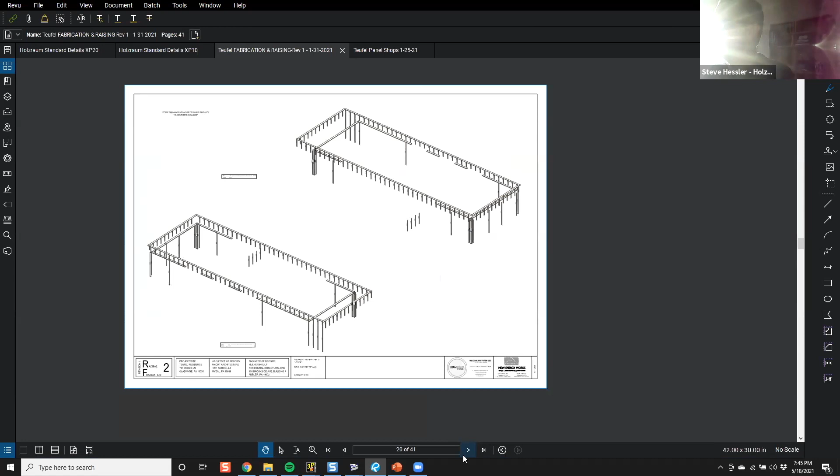These are some window install air sealing details. Now we're getting into the parts that are going to be necessary for fabrication and also for install. So these are the soffit panels, these are parapet and exterior wall, and then these are some panel connection details.

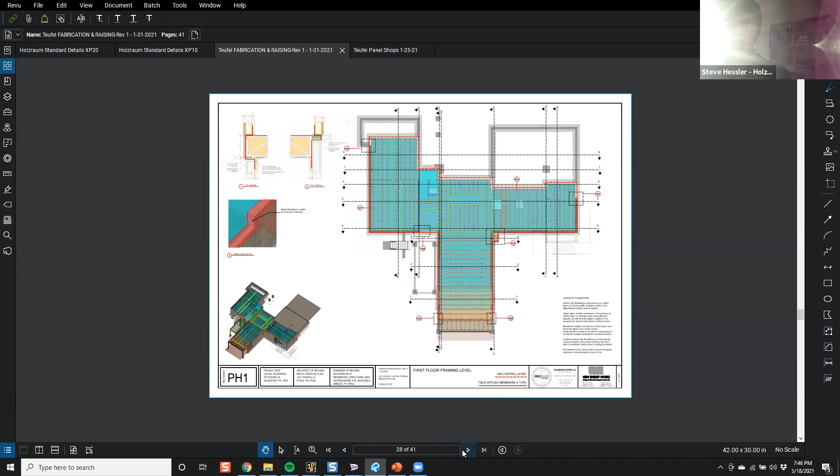This is the stuff I was telling you that Ilka does a great job of, really tearing this thing apart and finding areas that need specific explanation, some really weird stuff that she found that just needed to be called out. It's great because we go through this not only with the architect, Kyle Macht and Paul Macht, they're very serious passive house architects, some of the best we've ever worked with. Yet a building like this had us all like, holy shit, there's so many things that could go wrong here. So I think we all really enjoyed having those parts to sort of tell that story.

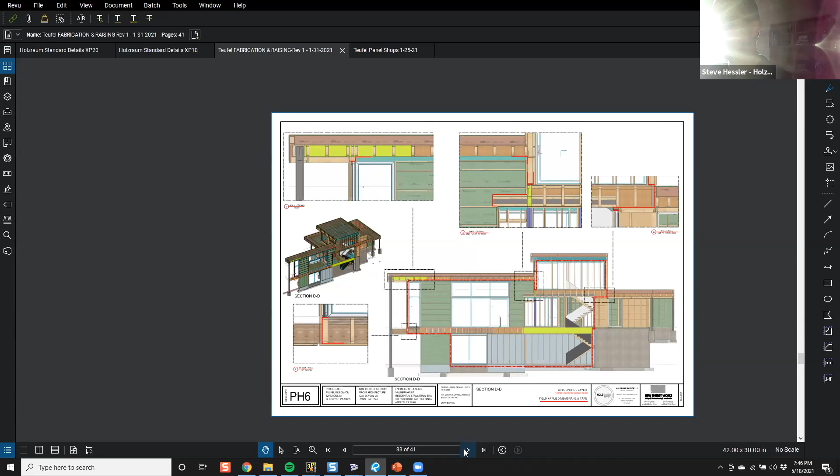And for Ilka, I don't know how she does it actually. She just knows where to look, but now she has the tool to really get her parts in her hand and figure it out. So I think that's most everything for that.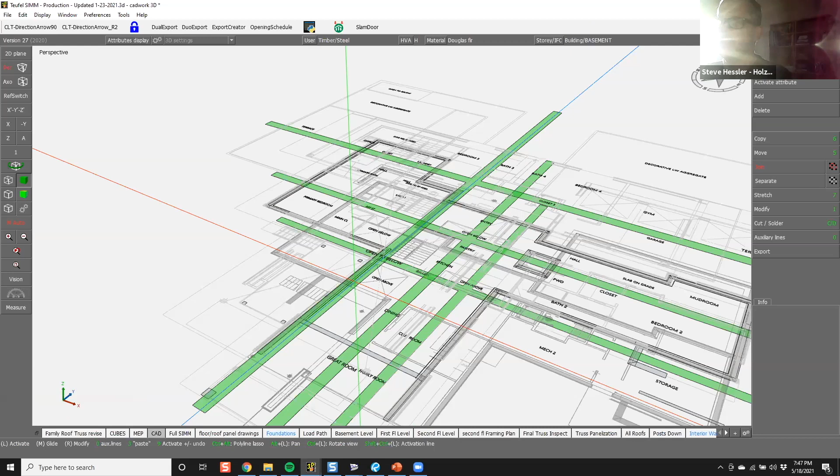So we actually find that, which is kind of cool for people who are still drawing in 2D CAD, is that we can almost build almost as well from 2D as from 3D, but 3D obviously helps us to visualize it. So we're just kind of building out, taking sections and extruding them out.

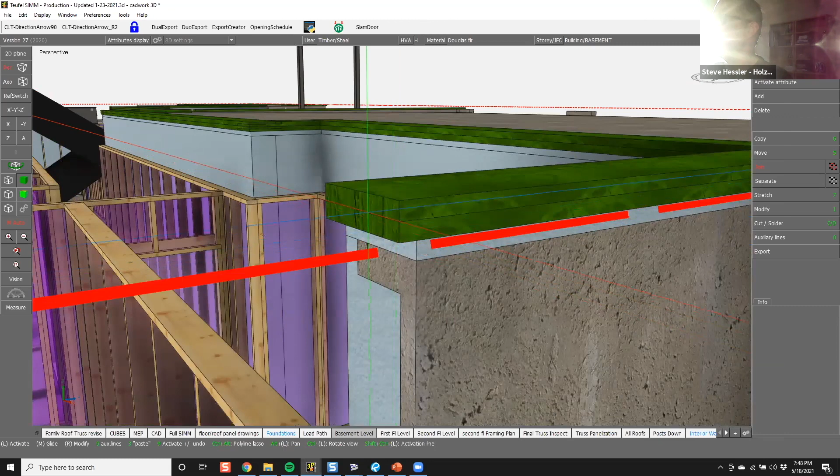We're able to really look at exactly what we did - a weird double plate. Kyle came up with this cool double plate, but we actually have insulation underneath the plate. There was some Armatherm detailing we went through. First floor level - this is actually from before I had all the truss geometry in there.

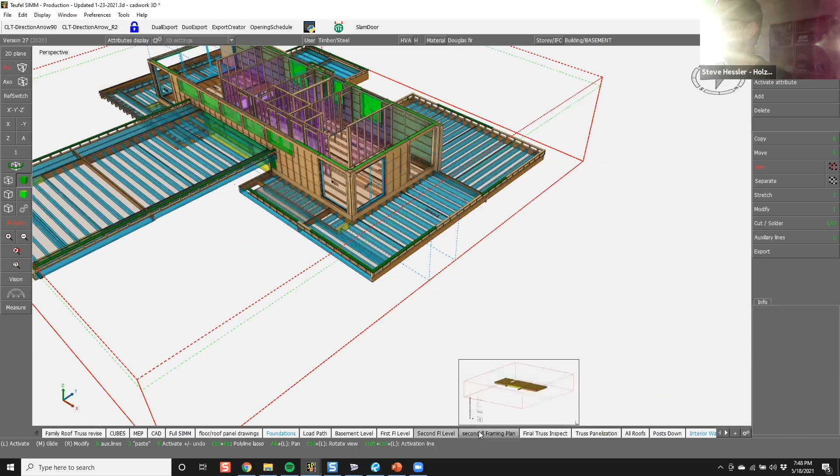Second floor level. So we're creating these volumes, and eventually we're going to replace them with actual framing. Some of these are actually panelized trusses. What's cool is at this point you're looking at a fully blown out production level model.

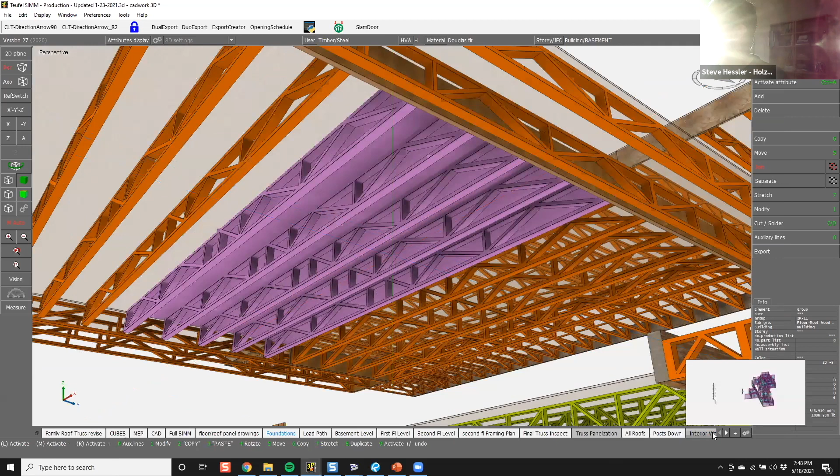Everything's panelized. So if I want to look at that panel, that's the panel, right? And that's true if I'm looking at exterior walls - I can grab a panel, that's the panel. I want to see what's in it, I want to find out exactly what part. There's data attached to every single part. If I want to go back and look at the exterior walls, then I can just click on a wall.

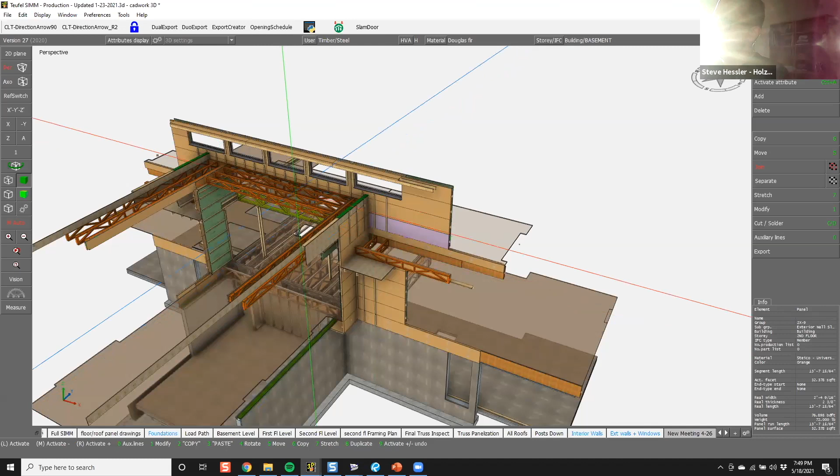There were a couple weird issues we were looking at, so we had a meeting on some of these parts. There was some weird stuff happening - these are some tricky spots in this building. This whole thing right here and this one are just weird because the air barrier is doing strange things. Or this is where Ilka found this steel beam that's kind of blowing into the air barrier.

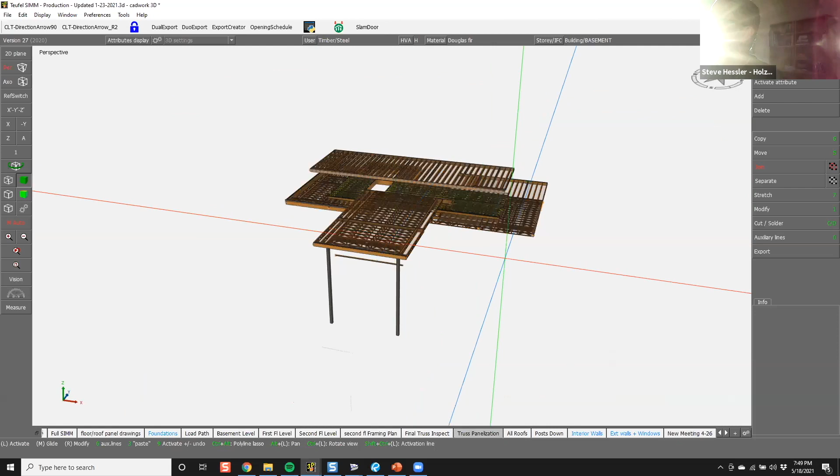So we can just kind of grab things, and boom, I need to look at the panel, and now I'm looking at the panel. It's just crazy. And what's also very cool is I go back into the truss panelization, and when we do this MEP charrette stuff, whether I have trusses on or walls on, I could also bring in some interior walls. You can start to build out the content you care about.

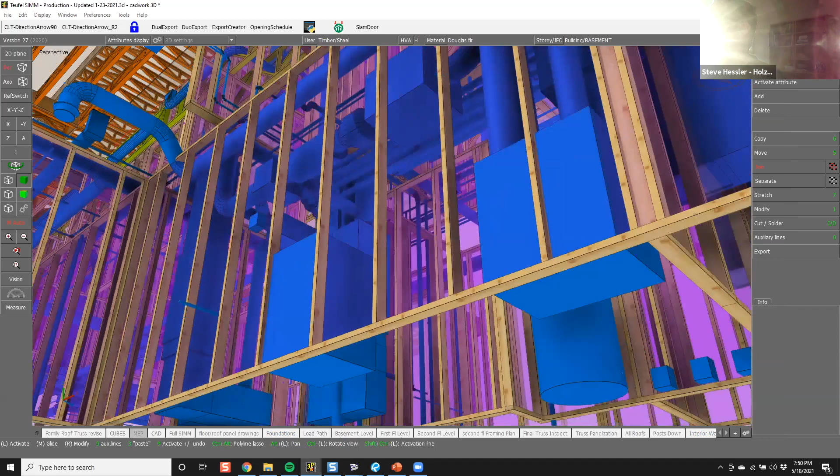And now I've got MEP and it's sitting inside, and now I can do a horizontal and vertical alignment, see what's happening underneath. I can look from the side, I can isolate what I want. It's like having your hands on the parts.

Steve, before we end up at the end, can you talk a little bit more in detail about the design log that you create when you're in a meeting with people and you're looking at this together?

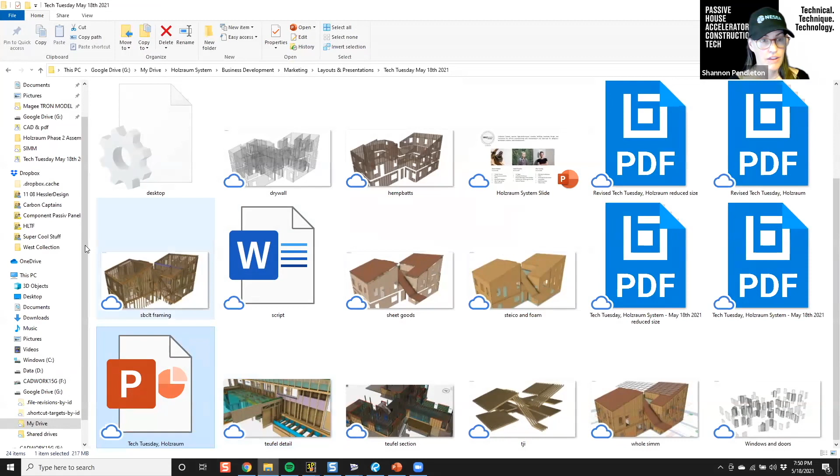Yes, just give me one second, I'm going to go get one. Okay, so this is the one for this project, and it is just super, super crude - it's a freaking Google sheet, right?

But it is set up so that you can filter along MEP, structural, architectural, Passivhaus, insulation, or custom issue. Like for our CLT projects, there's just a whole different set of categories that make sense.

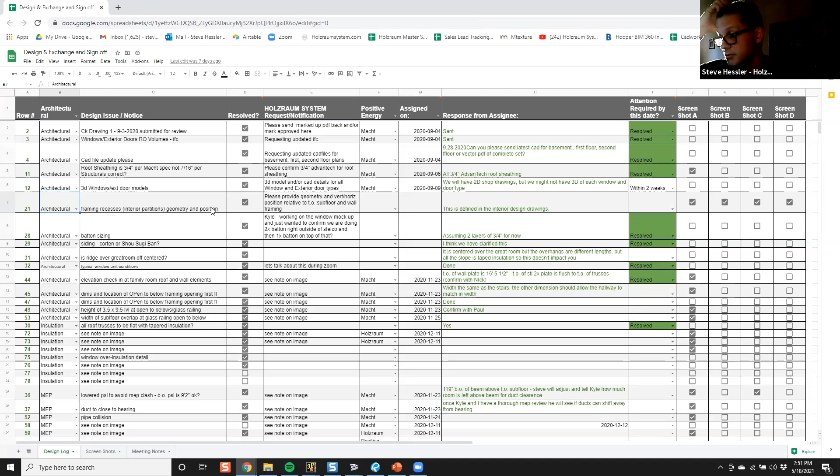Actually, on one of our projects right now, they're running their project on BIM 360, which is a great collaboration platform. When we ran through the building, in one of the meetings with the builder, we showed them this. We said, we're going to be communicating our issues with this, but don't worry, we'll let you know when we have an issue. And he loved it. So he said, well, we have to be able to do that in BIM 360. So for like a week, we all were trying to figure out how to do it in BIM 360, and then eventually he's just like, I'm just going to use your log.

So we added another column basically - he has his issue. So he's using the same log, which is nice because when we're in the meetings, he can use it, and then we turn it over to my stuff and we can use it. But it's very simple - the idea is you have a design issue, who do you need it from, who's the player that you need help from, when did you assign it, when would you like it?

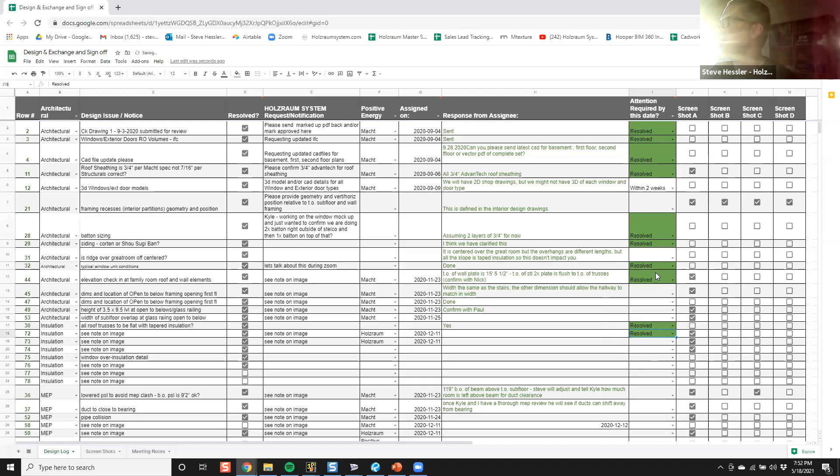If it's done and you're in the meeting and you go through this, it's resolved, then it gets called resolved. And over here, if there's a screenshot associated, you're basically saying there's A, B, C, D screenshots, and you go to the screenshots page.

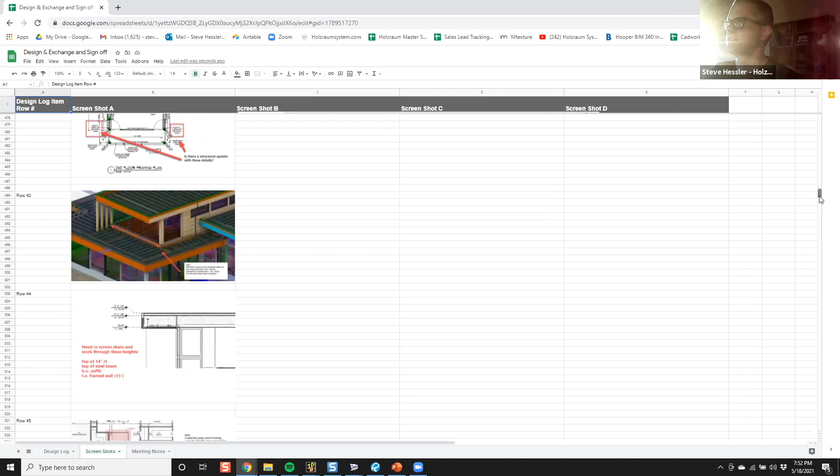This is the kind of stuff we're pulling while we're designing or in Zoom meetings. Sometimes it's from their plans, sometimes it's from our model. If you go through the course of this project, every single one of these is an issue that could have been a headache—every single one would have been a headache.

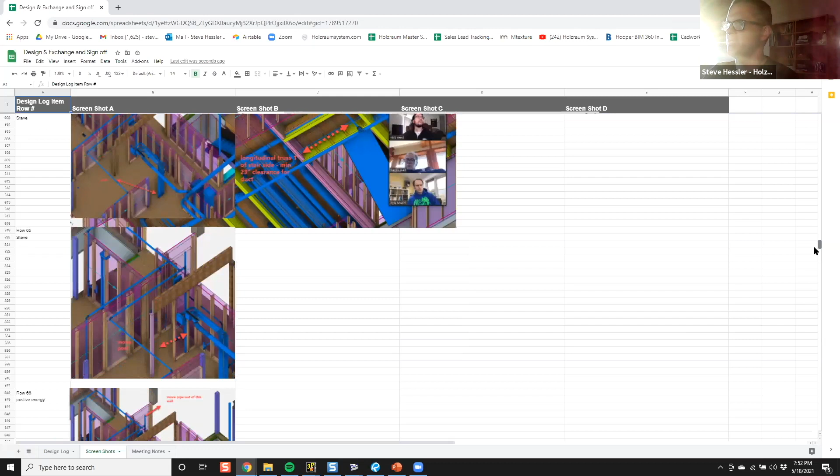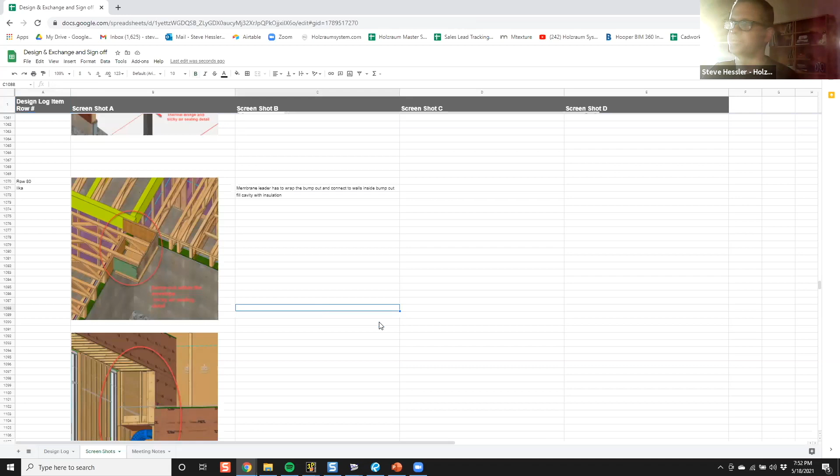So we're just going through, finding issues, fixing them. Usually we can fix them in the phone call or the Zoom, and then we just hope we got them all. Then we go to production, and so far we haven't gotten burned yet. So I think that's it, really. I mean, I think you saw the model, and yeah, that's it.